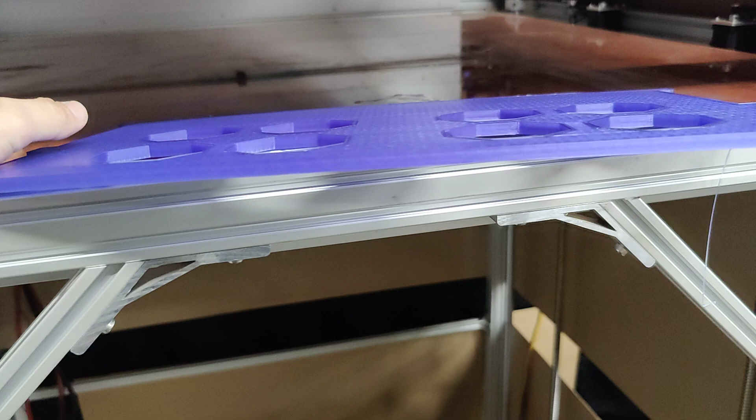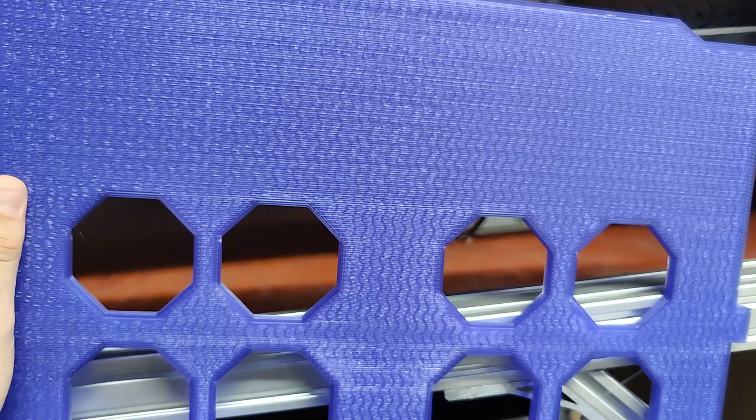My goodness, guys, I did something accidentally and it's fantastic. I gotta have you check this out. So this just came off my big printer, and look at how this looks.

Wow, this is honestly the best surface print I've seen this printer produce. And surprisingly, compared to the other ones I printed, this is just so much more rigid. What in the world?

Somehow, I'm pretty sure in my settings, and I'm not even sure where to find it because I was trying to turn it off, I ended up getting my top and bottom layer to only run one direction. So it's just stacking on top like this, it's not running a path like this. As you notice, it's a lot easier to see through, and you're not getting that cross pattern.

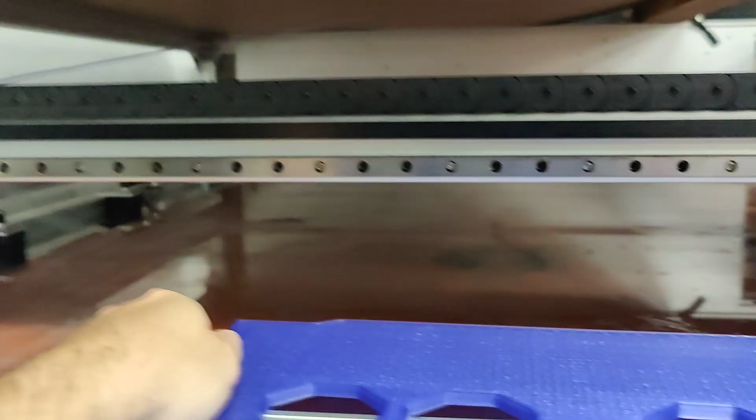What you're seeing on the inside there is the infill, and that's a gyroid infill. Now honestly, when I put this on, I wasn't super stoked about doing the gyroid infill because the speed at which I was printing the infill, it was really creeping back and forth. So what I'll at least do is probably turn the speed of the infill down a little bit.

But my goodness, that looks fantastic, and it is so stiff, surprisingly stiff, and the pattern on the inside is just really neat. I mean that gyroid, the camera is just not doing it justice. Right there is about as good. That just looks cool.

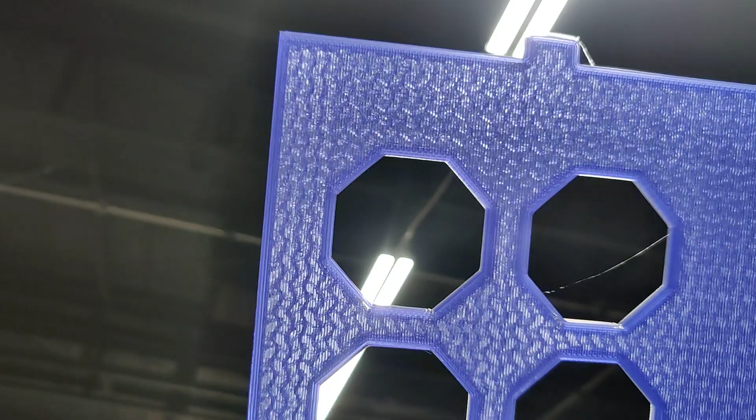It might work better if I look at this pattern in different places. Anyways, wow, there we go. That's about the best, it just looks really, really good. I am happily impressed with this.

It's almost zero stringing. I'm definitely saving this profile. This profile is gold as far as a really nice surface print. It took a little bit longer than I was expecting this print to take, but I think that's worth it.

I would not eat the cost, but I would definitely wait longer to have this as a finish. My goodness, I'm only sorry to the client that I didn't make every single one of his pieces look like this. He'll only get a couple like this, but I can always redo it if he absolutely wants me to.

You know, it is an R&D and research process. I am actively changing profiles and having to switch things out to try different things to make it work better. But we nailed it on this one. I was trying different settings to make these print good, and after printing about 20, or about 30 of these out of 40, the settings got nailed.

And a lot of those I did print, you know, 4 at a time. So it's not like I was changing settings on every single one. But I was having a hard time with this one printing 2 different pieces, only because it kept on peeling up on, or what was it?

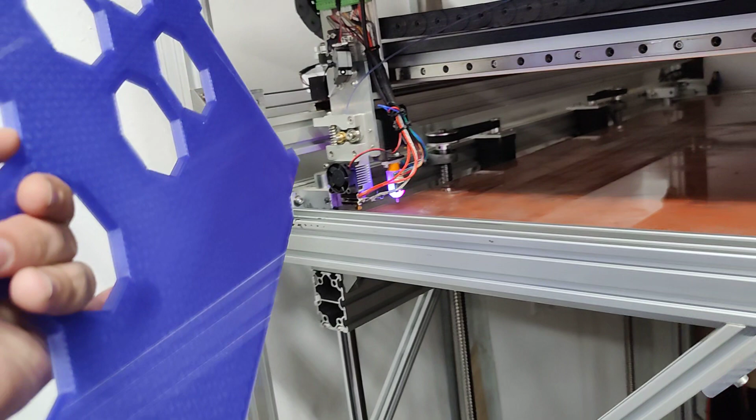For some reason, I think this is like a high flow nozzle, or maybe this fan's honestly just not powerful enough. I was getting a little bit of heat creep, and it was clogging up. So as long as the filament pushes through fast enough, the filament itself cools part of this upper part down. Well, maybe it doesn't, but anyways, as long as you're pushing enough filament through, it won't jam.

But man, I am just super impressed with that. And I'm honestly, let's look on Cura here, because I'm not sure.

Oh, I'm sorry, I did this without putting smoothing on. This video is going to be super shaky. I can already see the comments. I apologize if you're going to write in the comments that this was a really rough video. I'll try to hold it still, but I really don't want to do it. This is super cool.

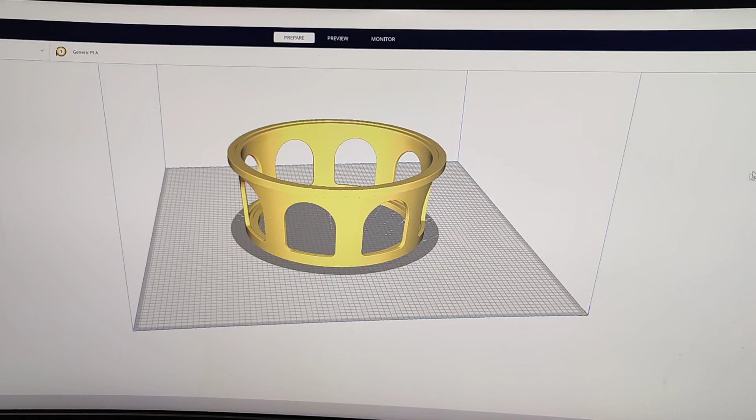Yeah, so looking at, just ignore that.

What in the world did I do to make the lines go like that? This wasn't even what I did it on. Okay, we've got print settings, layer height. I'll just, if you want similar settings, this is on a 0.8 nozzle. There's my layer heights, wall line count, alternate extra wall, top bottom thickness, enable ironing, infill.

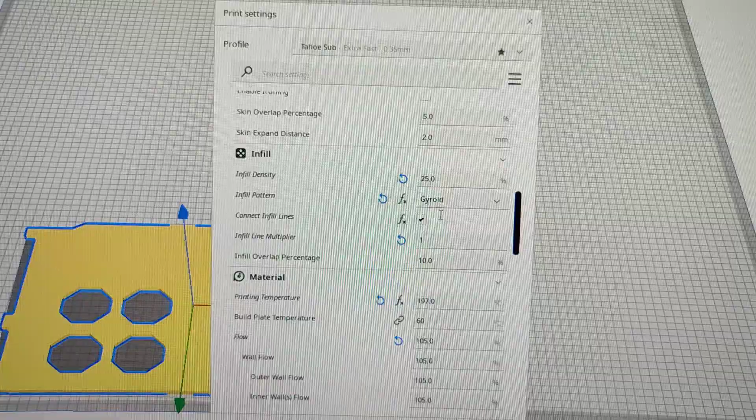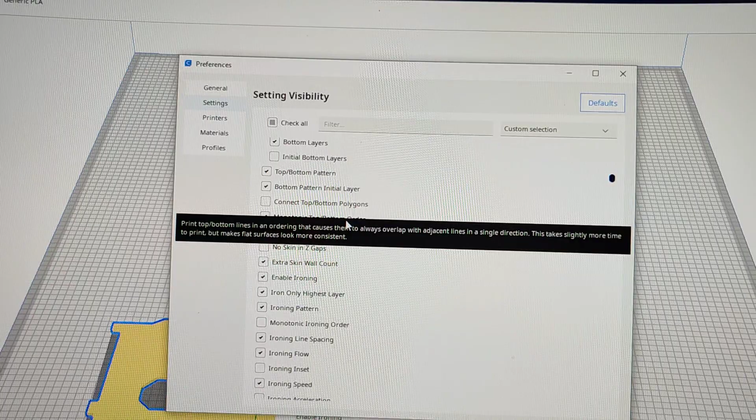It's gotta be something to do with these top bottom layers. Like, what is not turned on? Maybe... to overlap. Is that it?

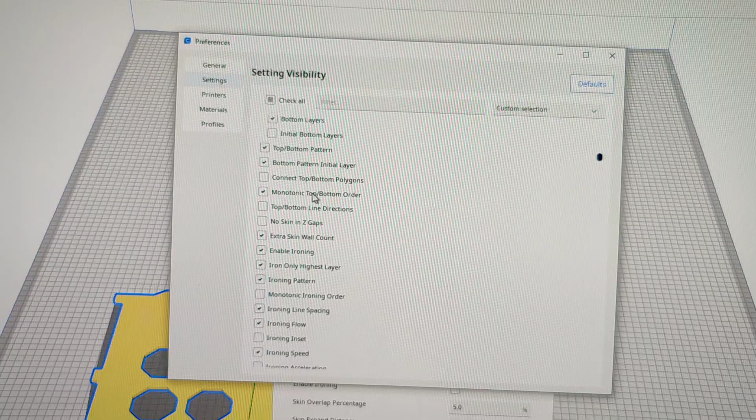Top bottom lines are in an ordering that causes them to always overlap with adjacent lines in a single direction. This takes slightly more time to print, but makes flat surfaces look more consistent. That might be it. I'm not sure. We'll see if it's turned on mine, because I might have accidentally turned it on. I mean, sometimes that's what happens.

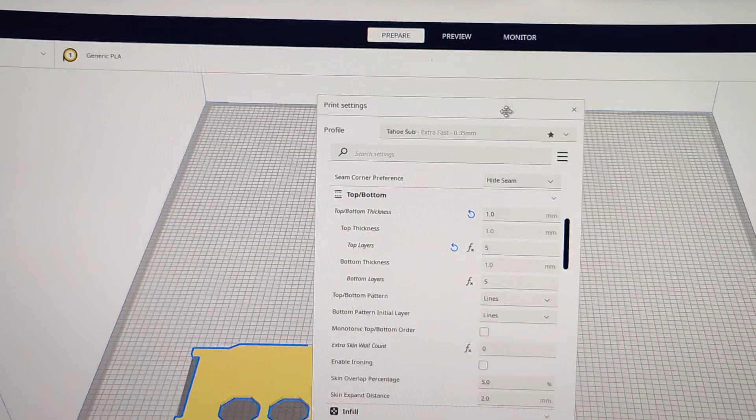Sometimes what I've done, because I have so many of these Curas open, from what I've seen, the last one open auto saves the files on whatever's there. So like this Tahoe sub file, if I close all my Curas out, whatever's the last one, and I reopen it, that's what's going to be pulled up here. So it does kind of save it, but when I've got a bunch of these open and I've made changes, if I'm not actively saving it, that's where I've kind of screwed myself up.

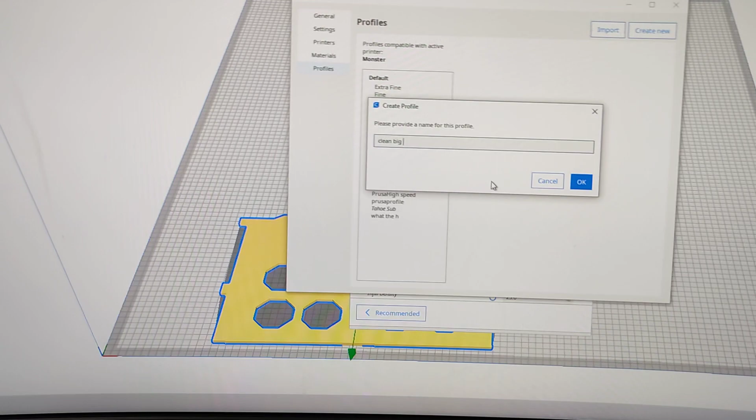So I am definitely creating a new profile from this one. This is going to be clean, big print. That's terrible, but whatever. And then let's see, mono, no, that wasn't turned on.

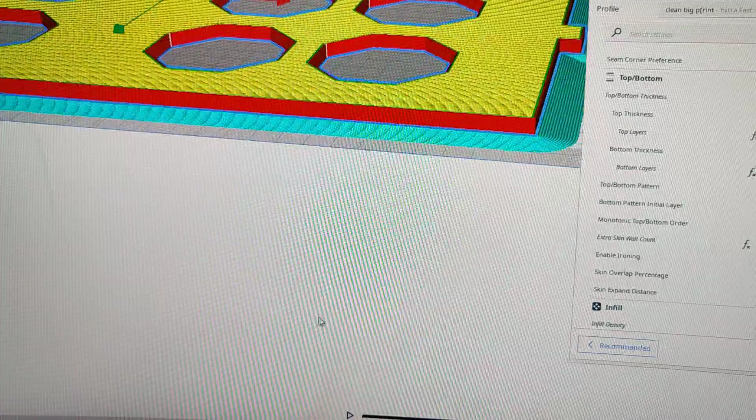What is making it do that? I'm literally not even sure. Yeah, look at the lines. What setting is making it do the same lines going that way? I didn't even know I could do that, honestly. Five years into printing, and I didn't realize I could, the benefits of running the lines just right over top of each other. What in the world?

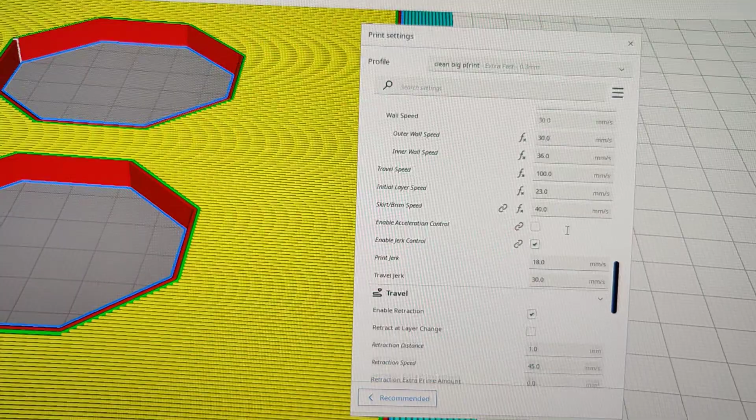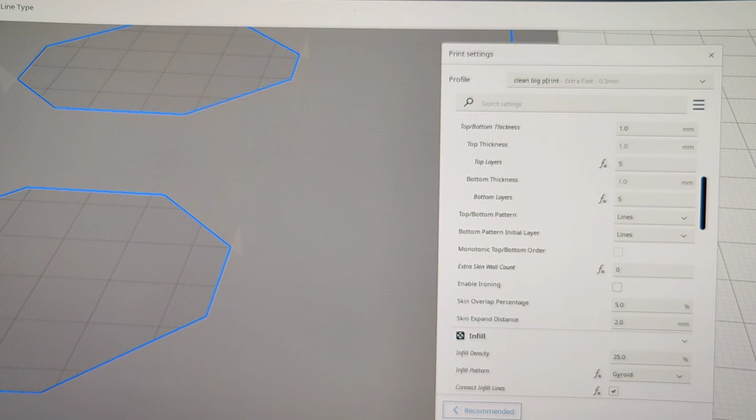We've got to find this, guys. We've got to find this. Okay, let's try this. Let's turn this on and just see what happens. Looks like the same exact thing. Okay, so I don't know, if I turn it off, maybe it was on by accident? No, that's still going the right way.

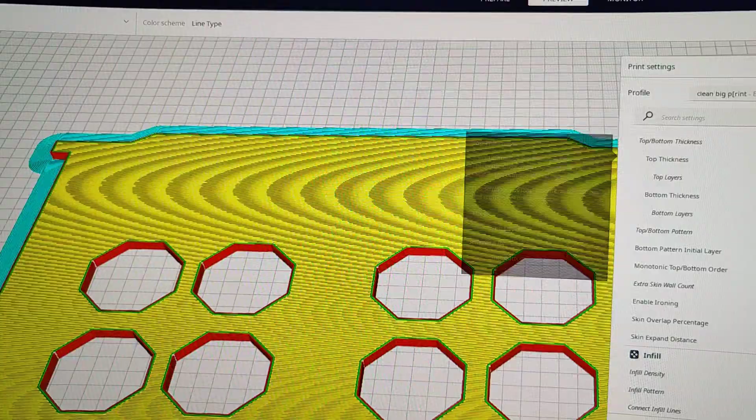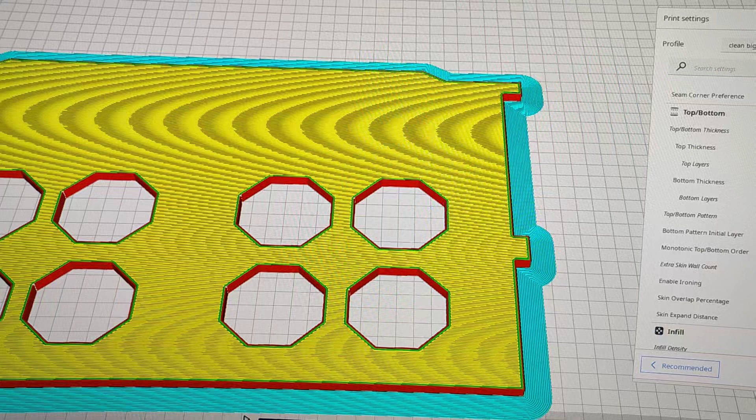Top bottom pattern lines. Is it because zigzag maybe? Is that what zigzag is? Did I turn it to lines and that's what it does? No. What is it? Layer thickness, is it like layer direction maybe? Let's see, is there, where's the advanced settings? What the heck? Maybe it's because I need to be here. No.

Where'd the other screen go? What the heck? I'm gonna have to like, there it is. Top surface, no, top bottom line directions. I bet that's it. Okay, so what happens if I do zero? Slice. So I just changed top bottom line direction. Yeah, that's what did it, I think. Okay, so top bottom line direction.

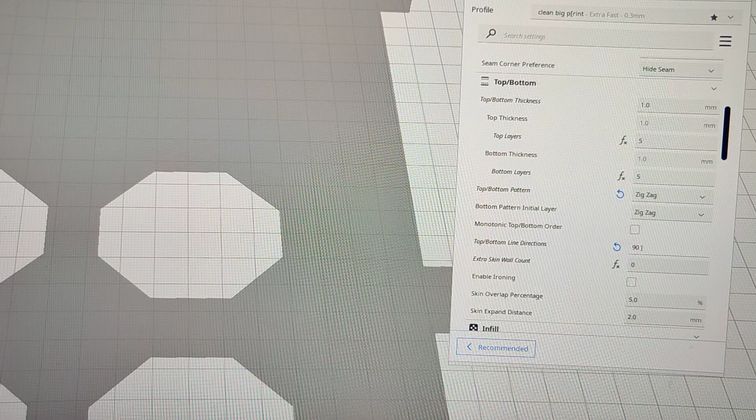If you want a really cool effect, I'm sorry this video took forever to get there. I probably could have told you all this in 2 minutes, but this is how you investigate and get what you're looking for. Okay, see now it's not, oh, maybe I have to have both brackets.

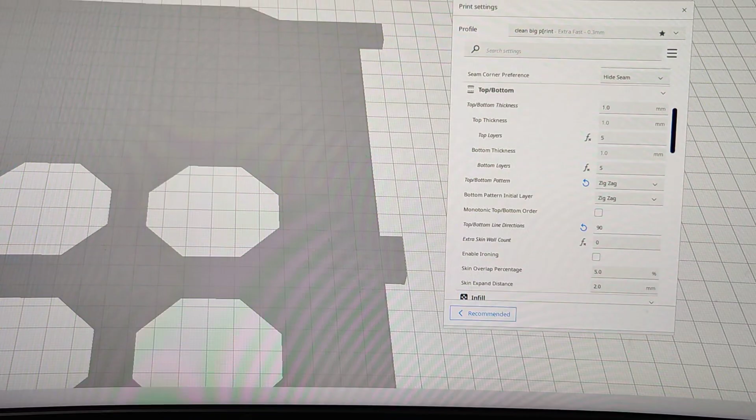So if you want the lines, hey, does that work? Let's see. No. Bracket one. Man, what the heck? Okay, let's try. Yeah, okay, so you have to have the brackets and you gotta type it in with the brackets.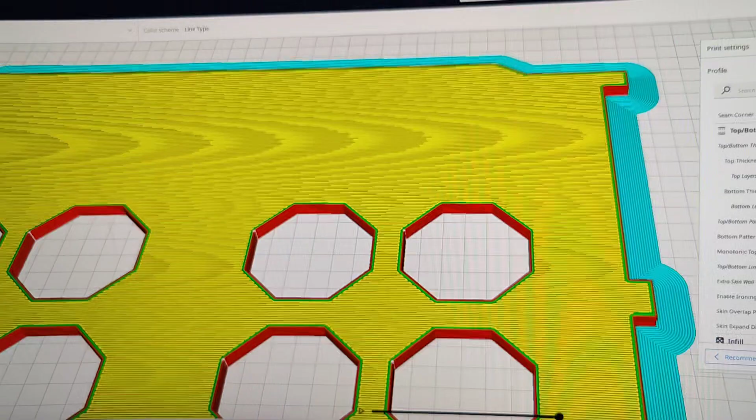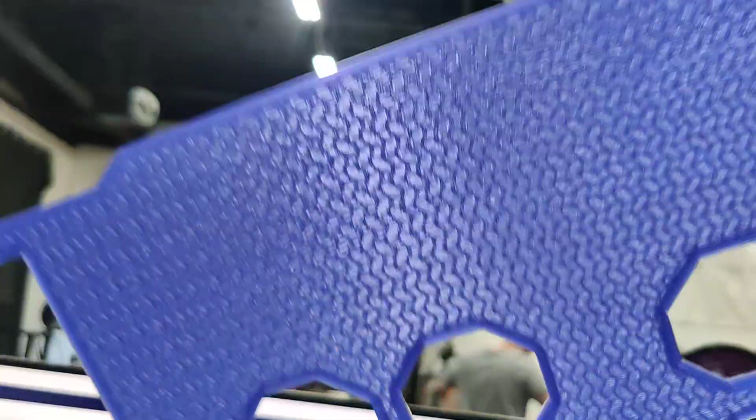But we're literally learning together here, so that's why this isn't just a straight up instructional video. This is just something that I saw was amazing and wanted to share with you. I'm not sure the strength benefits of this, or if there are any, but for particular transparent prints, that's going to be a fantastic finish.

So check out those settings in your prints, try them out, and we will see you in the next video.

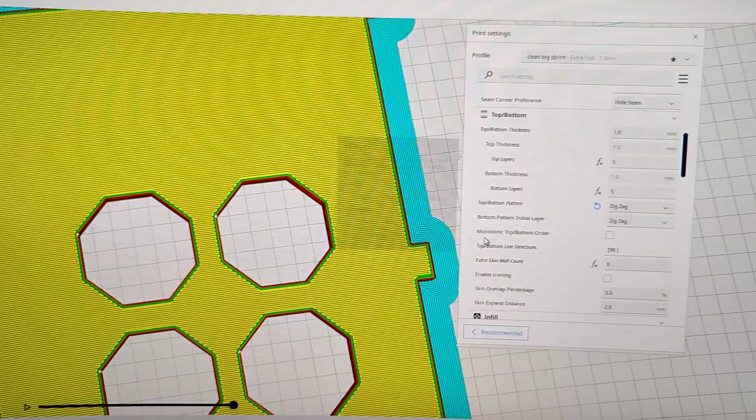I didn't know about that, so I'm sure a lot of other people didn't. Digging into Cura settings can be really intimidating, but that's how you can kind of find new things, and that was even totally accidental on my part. So have a good day, guys. Peace out.